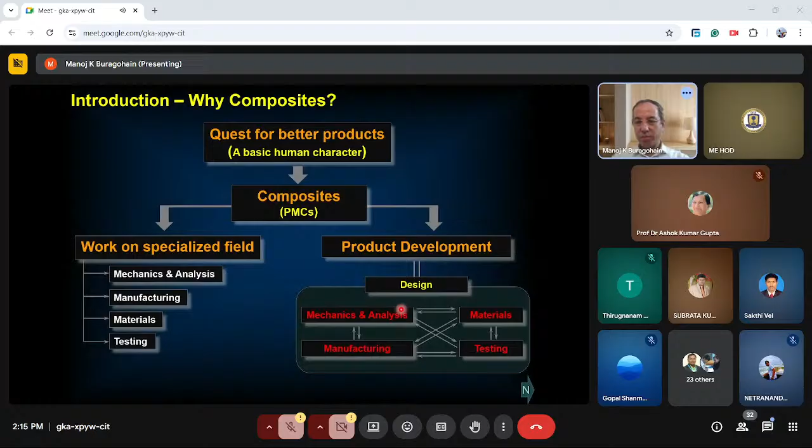Today's discussion will mainly be on the right hand side of this, that is, product development in an integrated manner. Before we go further, let us address and note that composites are used today in a variety of applications.

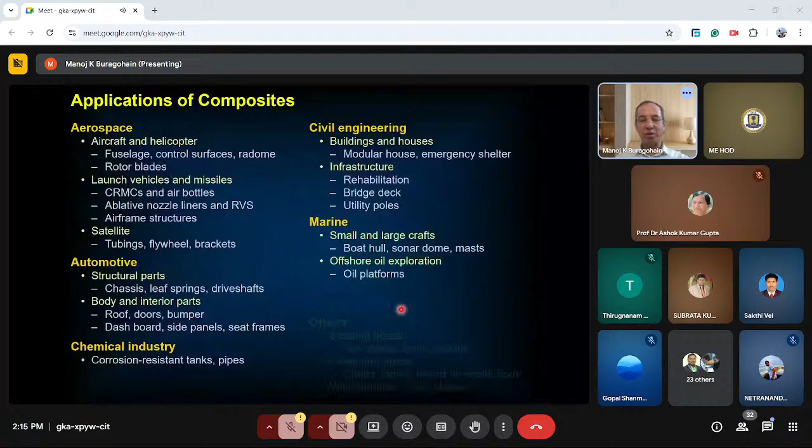I'm not going to read out all of these, but these applications span various fields starting with aerospace, automotive, chemical industry, civil, and so on and so forth - the list goes on.

Based on this, the scope and content of this presentation is basically twofold. First, a brief note on composites, where we will discuss four domain areas. We also, keeping in view the core area of this faculty development program, will discuss how to move forward in mechanical engineering, especially by using AI.

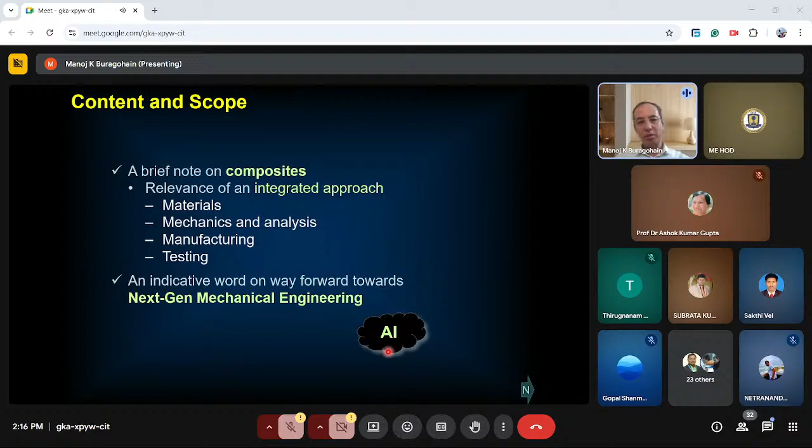But mind you, I am not going to discuss how AI can be adopted or applied - I'm no expert in AI. I'm only going to talk about some possibilities that can help us move forward and do innovations, do better things using AI.

Well, a few of the things will be very brief, very primitive - for example, the definition of composites. I actually do not know the background or composition of the audience, so I thought some things can be very elementary and others probably a little more advanced.

Composites are a kind of multi-phase material. One of the phases is basically reinforcement and the other is matrix. For that matter, whenever we talk about any structure...

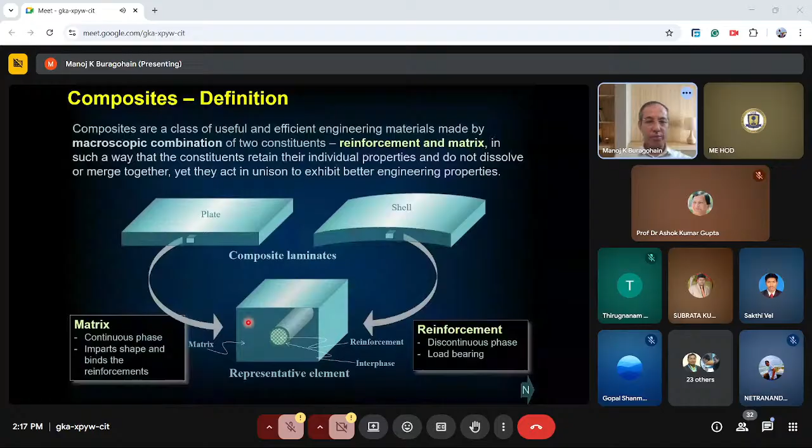A structure can be considered as composed of plates like this, or a shell like this. If you take a very small portion of it, a small element, and if it is a composite, we will have a kind of reinforcement, which is a discontinuous phase and is basically the load bearing phase. The other one is the matrix, which gives us the shape of the material or structure, and binds the reinforcement.

In the definition of composites, we must note three key aspects. First, as I just mentioned, it is a multi-phase material - matrix, reinforcement, and the interphase between the two. Second, the combination is at the macro level - they do not react chemically and do not lose their individual identities.

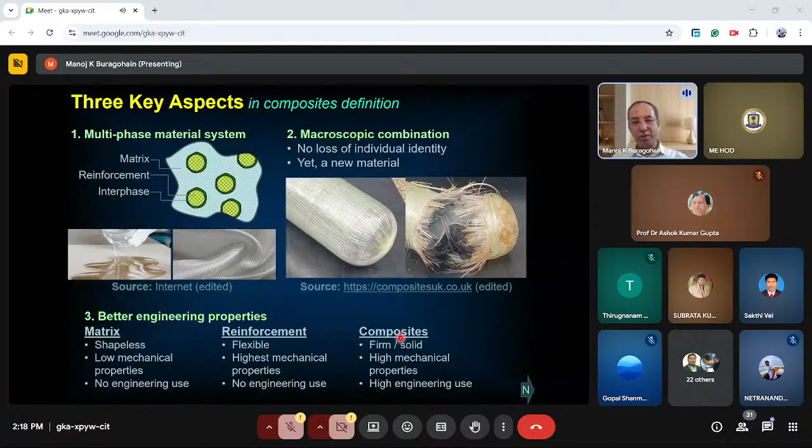For example, in this figure, this is a resin, and this is a reinforcement, some fabric. But when you combine them, you get a product like this, where the individual fibers and the resin retain their individual characteristics. But as a whole, the final product gives us better engineering properties.

Another very important point that I have realized after three decades of experience is that whenever we talk about product development, we must know where we stand. When you look around us, the materials around us are basically of 4 types: metals, ceramics, polymers, and composites.

Composites can have 3 basic matrix materials - either metal, ceramic, or polymer - and accordingly we have metal matrix composites, ceramic matrix composites, carbon-carbon composites, and polymer matrix composites.

Again, depending on the form or physical shape of the reinforcements, the composites can be isotropic, unidirectional, bidirectional, 3-dimensional, and they can be particulate, short fiber, flakes, or laminated composite, sandwich, etc.

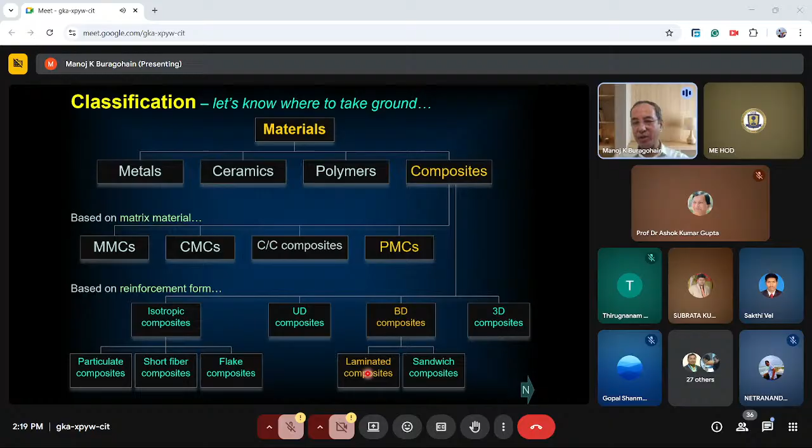Our discussion today will specifically focus on these laminated composites. When we design any composite products, we must know exactly what we are doing the design with. For example, if we are designing using flake composites, the mechanics procedures or design methodologies would not exactly be valid - that would have been otherwise valid for laminated composites. That must be kept in mind.

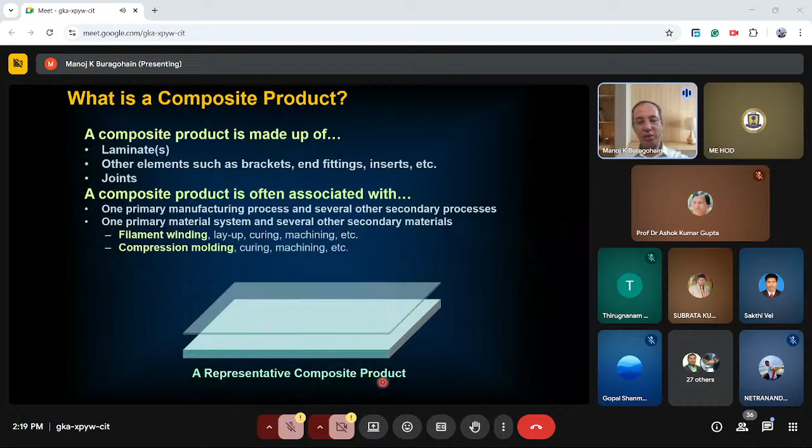Well, what is a composite product? A composite product is basically, I would say, something that would have a laminate - we'll come to the definition of laminate. Okay, you can see what a laminate is.

Basically it's something like this - it comprises a number of plies or laminae, and there are some metallic parts or other elements like a bracket or fittings, etc. And obviously there will be some joint. This is a very basic, elementary definition.

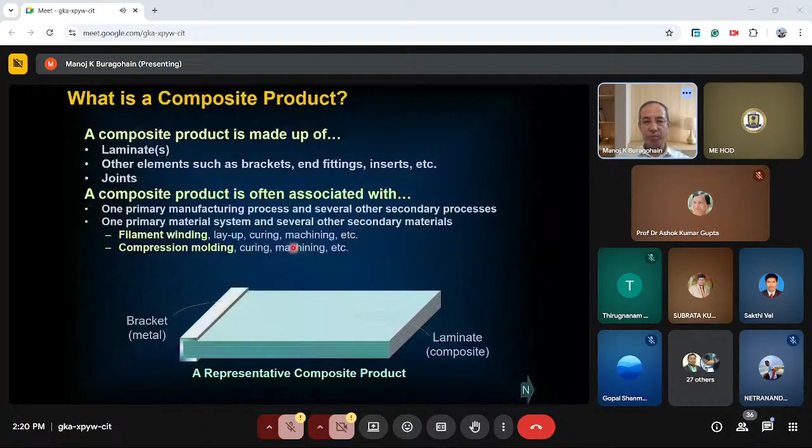Another point here is that in a composite product, composites would normally be a predominant part, and the manufacturing methodology will also possibly be predominantly one. For example, we'll see later that there are different processing methods - manufacturing methods can be different. A composite product can be either filament wound, but with some secondary methods as well like layup, curing, etc., or it can be compression molded, again with secondary methods like machining, curing, etc., and so on.

Now, when we talk about product design and product development, this is something I would like all of us to focus on. Product development can be considered as product design and its translation - that is, we can consider product design as a notional development. That means in our mind, we take care of the development of the entire product till final acceptance and qualification, which would involve considerations of all four domains I mentioned before.

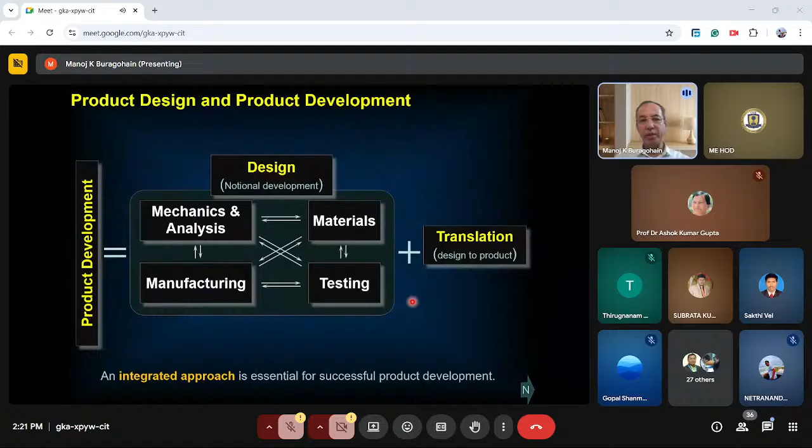Once I have done the design, the product design or notional product development, finally I have to translate it physically to a real product. Today we will be discussing this particular portion, minus the translation. It is important to note that an integrated approach is essential if we have to successfully design a product.

Well, the first part is the materials, and out of the two basic phases, reinforcement is the first one. From a mechanical engineering point of view, three very important aspects to be addressed are what are the common reinforcements available while making a composite product.

The reinforcements can be carbon fiber, glass fiber, aramid. There are other fibers like natural fibers, bamboo, basalt, or boron, and so on. But most mechanical engineering products use carbon fiber, glass fiber, and aramid fiber, out of which glass fiber is mostly used in common commercial applications, whereas carbon fiber and aramid fiber, Kevlar, etc., are used in high performance aerospace and other applications.

In carbon fibers, there are different types like PAN-based, pitch-based, rayon-based carbon fibers, etc., classified basically depending on the precursor materials. Similarly, glass fibers can be E-glass, S-glass, etc., depending on composition. And aramid fibers, Kevlar, Nomex, etc., are basically brand names.

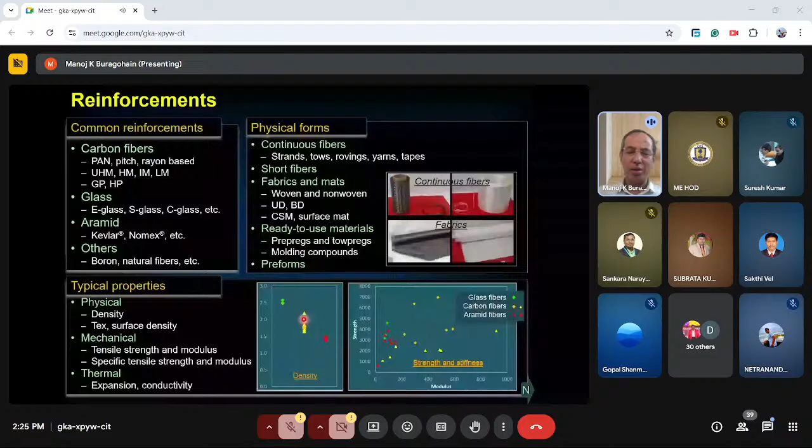Typical properties can be physical properties like density, surface density, etc., mechanical properties like tensile strength and modulus, thermal properties like expansion, conductivity, etc. We should also have some overall idea of what kind of properties a particular fiber can have. For example, carbon fiber can have a very wide variation in tensile strength and modulus, but density is normally reasonably close, varying in a close band.

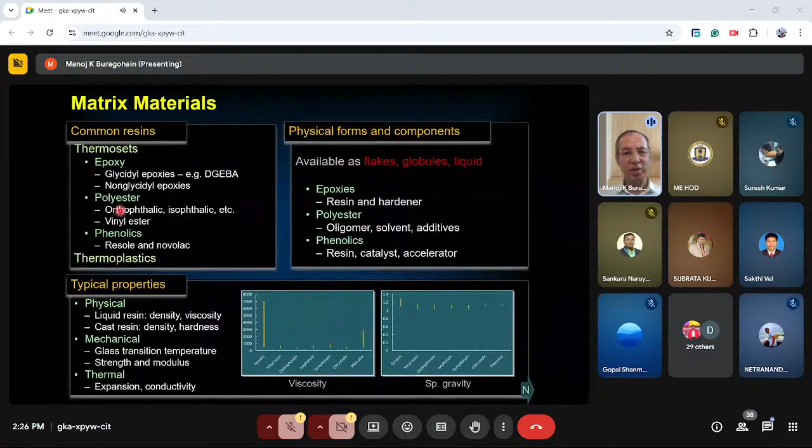Similar is the case with matrix materials. Here also we should know the common resins, the physical forms, and typical properties. Epoxy, polyester, and phenolics are some of the very common resin systems. They can be thermoset and thermoplastics. Epoxy is mostly used in high performance applications, polyester in commercial applications, phenolic mostly in some thermal applications, and so on.

I would not like to spend much time on the details, but I just felt we should know how to move forward. There are many aspects in respect of innovations, but today let us just have some discussion on how we can use AI in the composites.

In the case of materials, AI can basically be used in at least two different ways. One is material property prediction, and thereby selection of materials during design. The basic properties—that is, properties at the sample level and properties at the product level—these two terms should be differentiated. I would come to these product level properties a little later on.

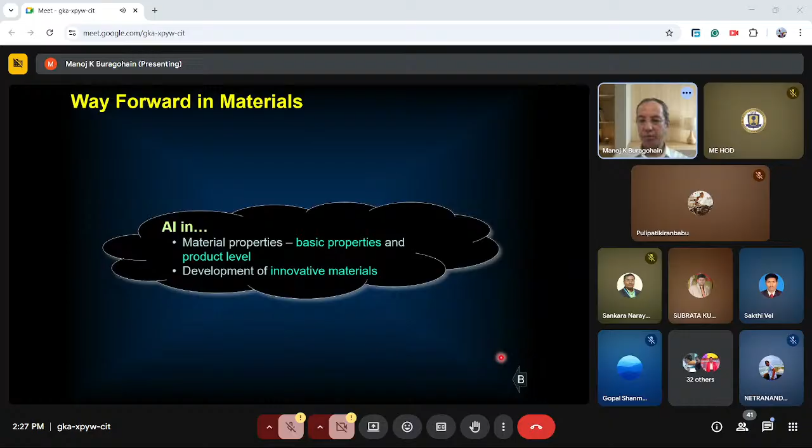The other way is that we need to develop new materials. When it comes to material development, material design, especially in composite material design, is a very important aspect, and AI can make a lot of difference. As a matter of fact, a lot of research work is going on in this field—the design of new composites or new materials.

Well, the next area is mechanics of laminated composites. Now let's have a look at how we define a laminate, or first a lamina. A lamina, as you can see here—sorry, let me just change the pointer.

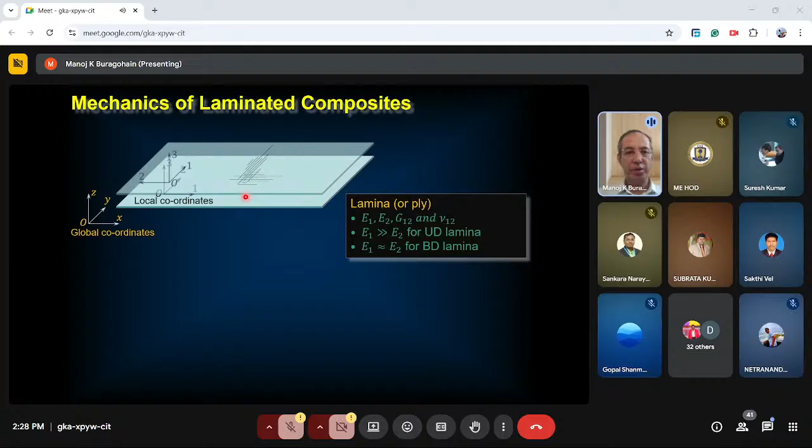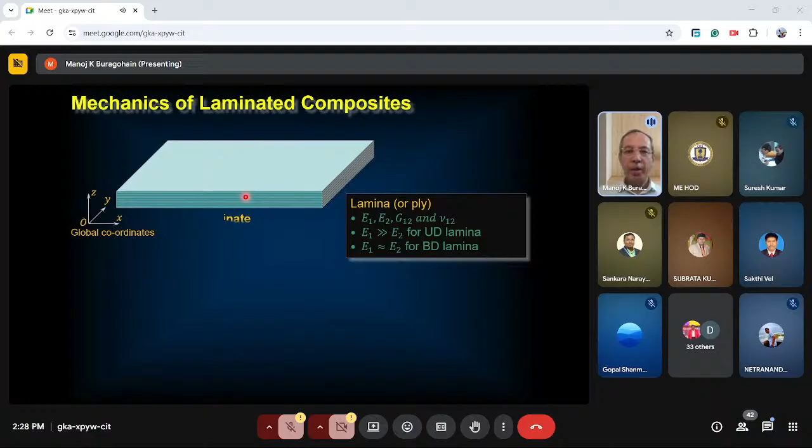A lamina is basically a single sheet of a composite layer. There can be two basic coordinates: one is the global coordinate x, y, z, the other is the local coordinate 1, 2, 3 coordinate system. Now, the plies can be oriented in different directions, as you can see here. So the local coordinates for each ply can be different, whereas the global coordinate is the same for a particular laminate.

And all this put together, what we get is a laminate. A laminate can be a flat panel, or a plate, or it can be a shell. Okay, and when it comes to composite mechanics, by the way, I'm trying to avoid going into the entire solid mechanics here, the total gamut of mechanics. So I just felt, let's just have a quick look at one particular aspect.

For example, for an isotropic material, we have got elastic constants: E, G, and nu, out of which any two are independent. Whereas in the case of composites, this number can actually be 81, but under a number of simplifying assumptions, this number can progressively be reduced to 36, then 21, then 9, then 5, and finally 4 for plane stress conditions, where we have got E1, E2, G12, and nu12.

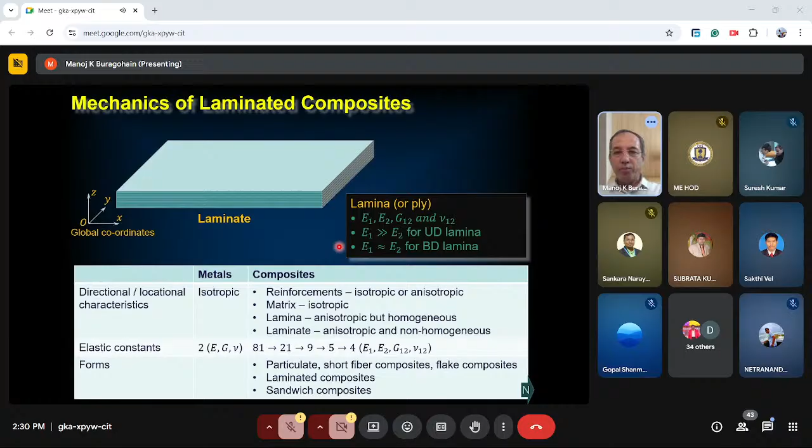And these four elastic constants would actually define a lamina, or a single ply, in our laminated composites mechanics.

And again, when we discuss the mechanics of a composite structure, we can look at it from two angles: on the left side, the levels in the building blocks of a composite structure, and what are the different levels in the study.

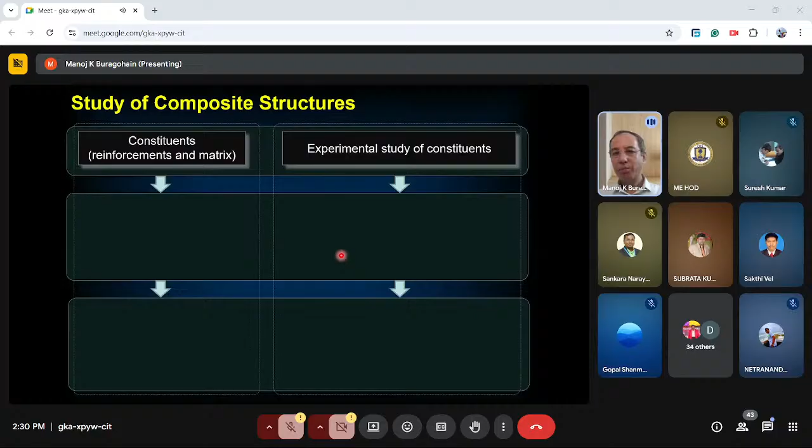As we know, any composite material is composed of reinforcement and matrix, the constituents basically. At this level, the study is basically experimental. The next level is the lamina, or the individual ply. At this level, the study is either experimental work on the lamina or micromechanical studies.

That's where we come across terms like micromechanics of lamina. At this micro level, or micromechanics, we would actually look at the interaction between the resin, the matrix, and the reinforcement.

And a lamina can also be studied at a macro level, where the lamina is considered, as I had shown in the previous slide, represented only in terms of those four parameters: E1, E2, G12, and ν12.

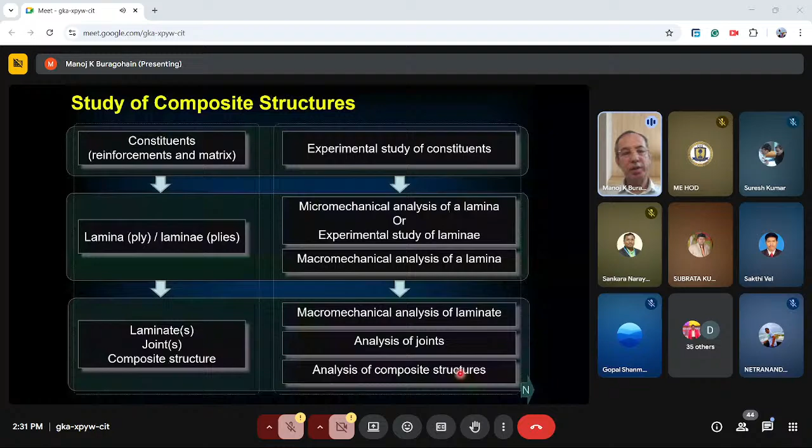And finally, when it comes to a final product composed of a few laminates, joints, and composite structure, here the analysis is essentially at a macro level. So we have got macromechanical analysis, and analysis of the joints and overall composite structures.

And this particular definition, or framework, I've just tried to show in the form of a triangle. Let's look at it a little bit more in detail. At the base of this triangle, we have got the constituents, the fibers and resin.

As I told before, the study here is essentially experimental. The next level is the lamina, or laminae, where the study is experimental, micromechanical, or macromechanical. Then, by combining a few laminae, we get a laminate. At this level, the study is essentially macromechanical.

Then, finally, we get the full-scale product, where the study is essentially experimental, or we can do studies by means of FE and things like that. In between, we have got two more things: the elemental level study and subscale study.

Elemental level study can be, for example, if you consider a laminate that has got some cutout, or a provision for some bracket or similar feature, then the standard macromechanical analysis tools may not be applicable. There we have to devise some sort of specialized element or shape configuration for that particular part, and we study it mostly with experimental work or by finite element.

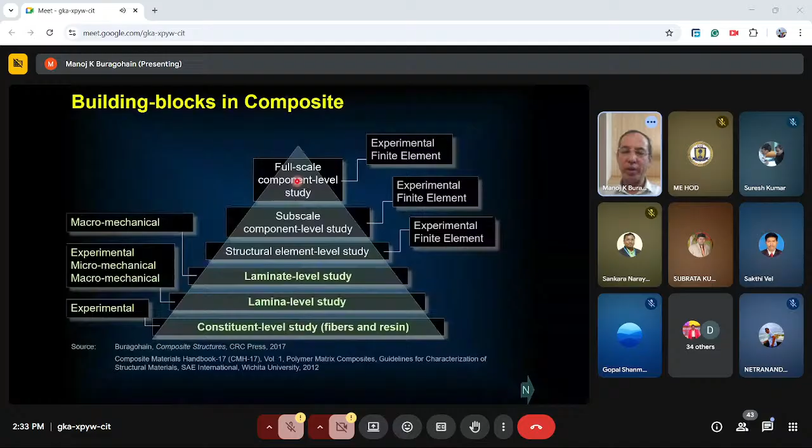Similarly, a subscale component can actually be the full scale component, the entire final product, but modeled at a smaller scale, and there also the work is basically experimental and finite elements.

Well, I'm sure those who are into composites will know what CLT means - classical laminate theory. That's what it is. This is one particular topic that is central to mechanics of composites, especially laminated composites. But here I would like to make another point: most people in the composites industry, especially those on the shop floor,

would consider mechanics of composites as a complex subject. Now, I made a point in the very beginning that classification matters. First we should know where we stand, and after we know that we are in the laminated composites group, and then in this classical laminate theory, the overall procedure is something like this.

We start at the mechanical properties like E1, E2, G12, and nu12 - that is the longitudinal modulus along the fiber direction, the transverse modulus across the fibers, the in-plane shear modulus, and the in-plane Poisson's ratio. These four stiffness parameters would define the lamina, and this is basically for the material.

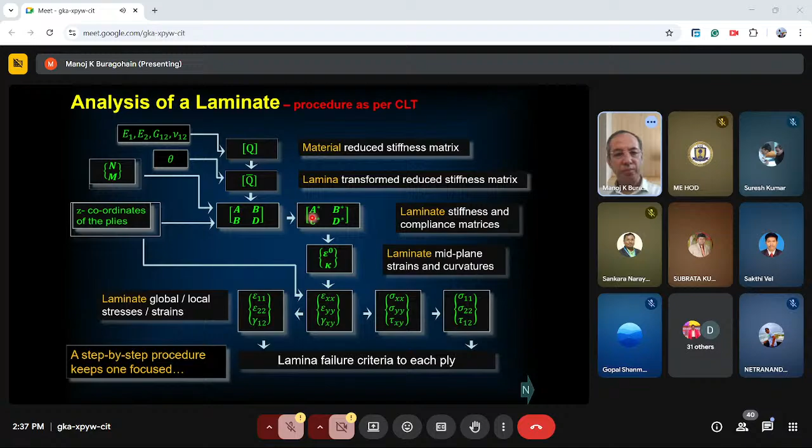This is, in very brief, how classical laminate theory would work. Quite obviously, I have not addressed these parameters in detail, so it might sound a little too much for those who would not possibly know what CLT is. But my only point is that if we follow a step-by-step procedure the way I have just defined, then mechanics is not really very difficult.

Well, finite element analysis, I'm sure everybody would know, but I just felt we should remember a few points. First of all, finite element modeling of composites is not design of composites. I have come across many professionals and students who, whenever I would ask 'can we do a design,' would straight away move to the analysis. There is a basic difference.

There are a number of points that can be cited as the difference between design and analysis. I'm not going into those, but let us note here that there are several FE packages like ANSYS, Abaqus, Nastran, NISA, etc. These packages are definitely helpful, but we must know what is going on when we do analysis using them. We must remember what GIGO stands for - unless we know what these softwares or packages do, we would not really know what output we have got.

In the case of composites modeling, these particular areas must be taken care of: anisotropic material properties - composites are anisotropic, we must remember that. Stacking sequence is very important - in a laminate there are a number of laminae or plies arranged in different orientations. If we do not take care of the orientations, that is Q bar - remember Q bar is different from the Q matrix - if we don't take that into account, we are bound to get wrong answers.

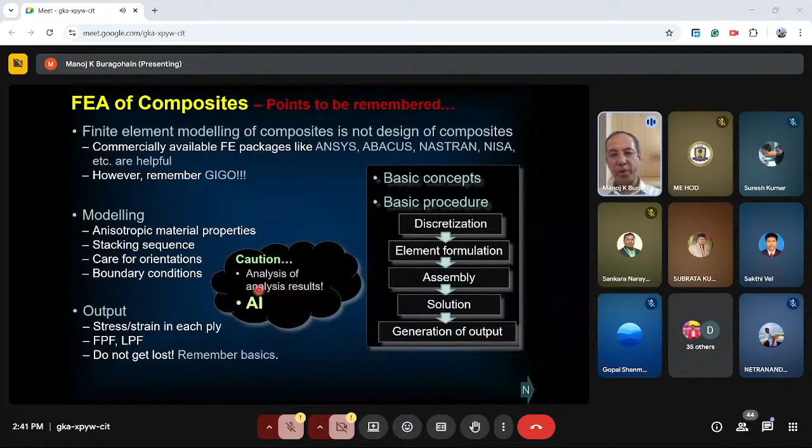It is important, as I was trying to say, that whenever we do any analysis, especially with composites, we get a deluge of information - a lot of data, stress data in each ply at different locations, strain data in each ply at different locations, and in thermal analysis, temperature distribution, and so on. Now how do we take care of this data and come to a conclusion? There is a possibility that we can employ AI to find some pattern in the data output, and possibly do analysis in a more fruitful and meaningful way.

Well, how do we go about it? Mechanics of composites is complex - normally that's what is perceived, and to some extent it is true because of the anisotropy nature of it, and the large number of elastic constants. It can be 81 if totally anisotropic, but otherwise it can be brought down to 36, 21, as I said before, 9, or finally 4 numbers. In spite of that, there are more numbers.

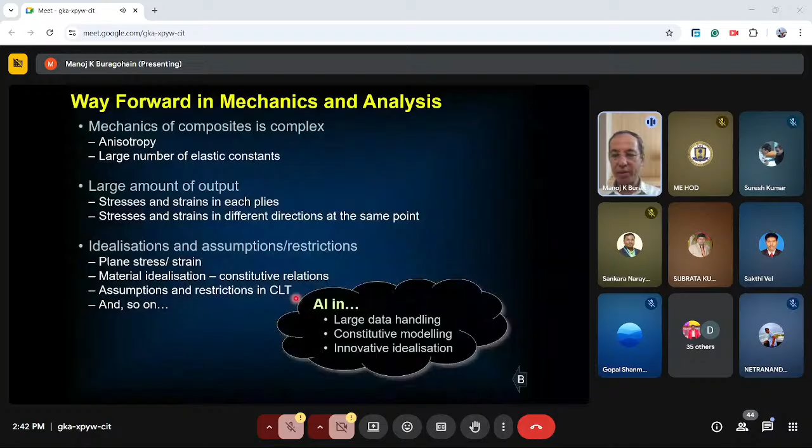A large amount of output data is always created, and idealizations - there are assumptions and restrictions in respect of plane stress and plane strain conditions, material idealizations, the constitutive relations obtained by experimentation, and assumptions and restrictions in classical laminate theory. Are these all valid? Now there is a possibility that AI can help us arrive at or develop some more realistic constitutive model, and accordingly we should be able to do more innovative idealization and get more realistic and efficient analysis of composite structures.

The third domain in composite technology is in respect of manufacturing. Composite manufacturing is different from metal manufacturing - by definition it is a process of material addition, unlike metal where it is a process of material removal. There are different processes that can be broadly classified into 3 groups, and this is only for the sake of discussion, for convenience.

The first one is open mold processes, where you have wet layup, pre-preg layup, spray up, rosette layup, etc. In these processes, you have a mold or kind of metallic plate or some other hardware on which you do a layup. Basically, one side of the mold is open, and that's why it's referred to as open mold process.

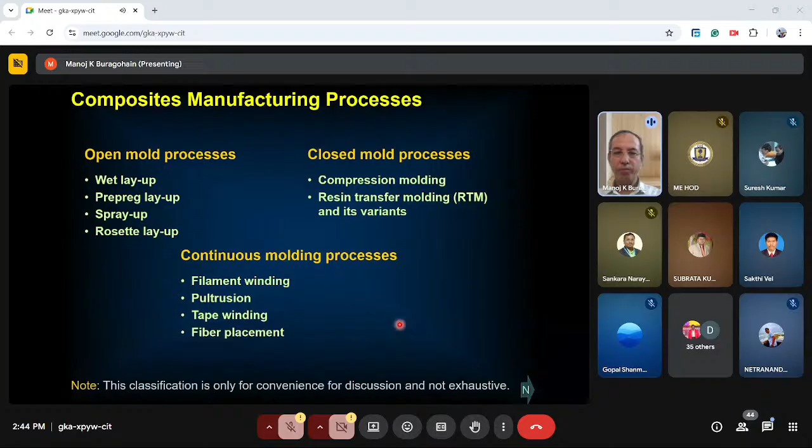Whereas in the case of closed mold processes, there also we use a mold, but there will essentially be at least 2 halves, or a kind of closed cavity will be formed inside a mold where the composite is formed within that cavity. There we have compression molding, resin transfer molding, etc., with a number of variants.

Then we have continuous molding processes like filament winding, pultrusion, tape winding, fiber placement, etc.

Well, irrespective of whichever method we would consider or be interested in using for any composite product development, there are basically four basic steps that are always there in any composite processing. They are impregnation, layup, consolidation, and solidification. Note that these four steps will necessarily be there in any manufacturing method in composites, but the way we implement them would depend on the particular method, and the sequence can also be different. But let us know what these four steps are.

The first one is impregnation. This is a process where basically each and every filament in the reinforcement is wetted by the resin.

The next one is layup. It corresponds to orientation. Basically, the wetted reinforcements have to be placed in their respective orientations.

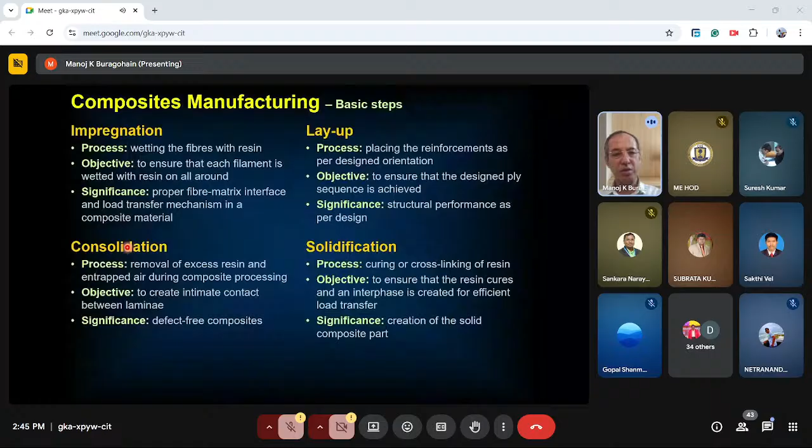That concerns the layup. The third one is consolidation. In this step, we ensure that excess resin or any air gaps are removed, so that there is intimate contact between the wetted fabrics or wetted filaments.

And finally, a composite takes shape when the resin solidifies. When we make a composite product during impregnation, the resin is in a liquid state, and it has to solidify. This is mostly referred to as curing, during which the resin undergoes cross-linking. Small polymer molecules in a monomer cross-link and become large molecules, forming a complex three-dimensional network of large molecules. As the resin cures, the composite gets its own solid shape.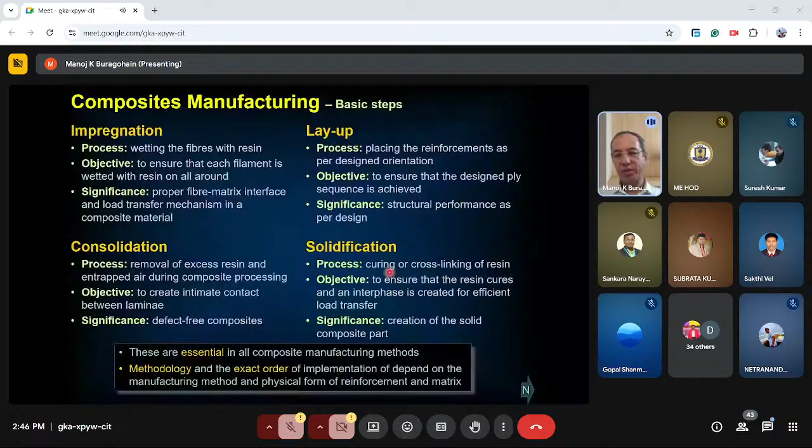As I said, these are all essential steps, but the methodology and exact order of implementation depend on the manufacturing method and physical forms of the reinforcement as well as the matrix. Let us have a look at the various methods quickly.

For example, wet layup. As you can see here, there is a mold. This is one-sided, so it is called open layup. We go on placing the fabrics, dry reinforcement or wetted reinforcement. This is how a layup goes.

There are a number of advantages and disadvantages. It is a simple process and needs very low capital investment, but it is highly labor intensive. Part quality is often dependent on individual skill, and the process is somewhat messy.

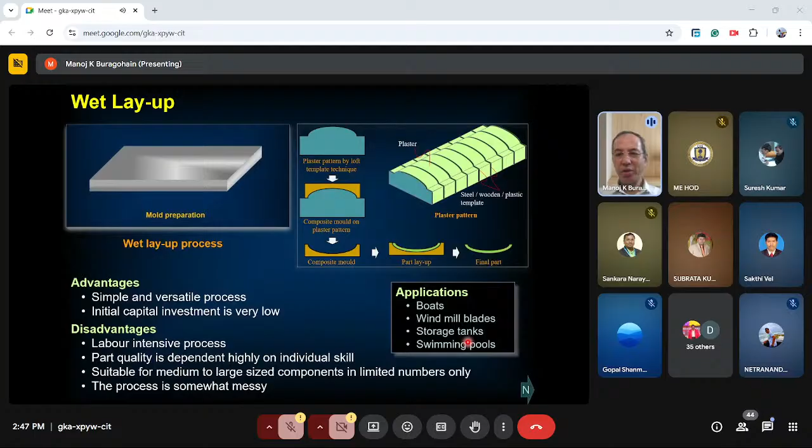A number of applications use this method, for example boats and windmill blades. You can use a kind of loft template technique for making blades, swimming pools, storage tanks, and so forth.

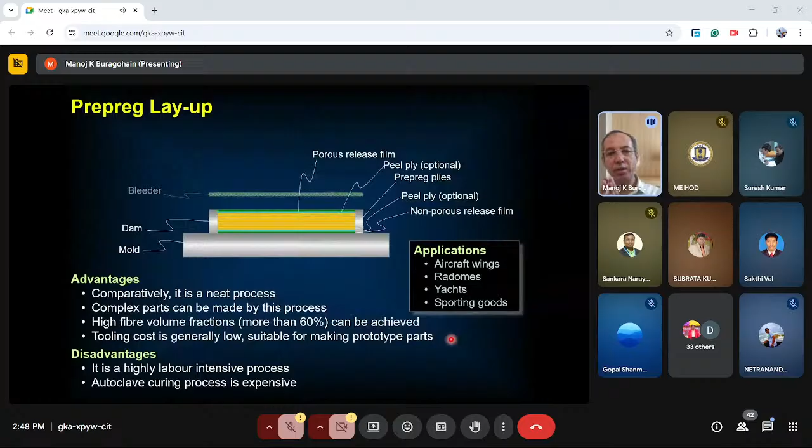Then pre-preg: here the impregnation of the fabric takes place earlier, before we go to the shop floor, and the resin in the reinforcement is advanced to a stage called B stage, where it becomes easily usable and is stored in cold storage and used in this way.

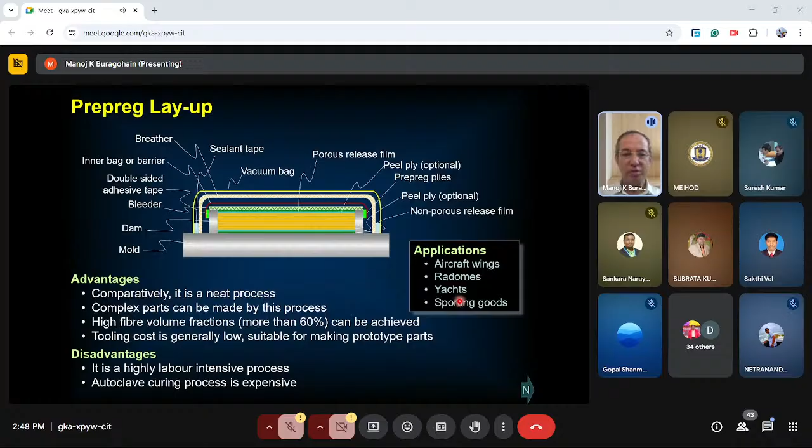It is cured mostly under vacuum in an autoclave, where we apply high temperature, along with positive pressure and negative pressure, that is vacuum. This is also an open mold process, and it can give rise to very good products.

For example, aircraft wings, radomes, sporting goods, etc. use this process. But it has some disadvantages: it is very expensive, especially the autoclave consumables, and the autoclave itself is also very expensive equipment.

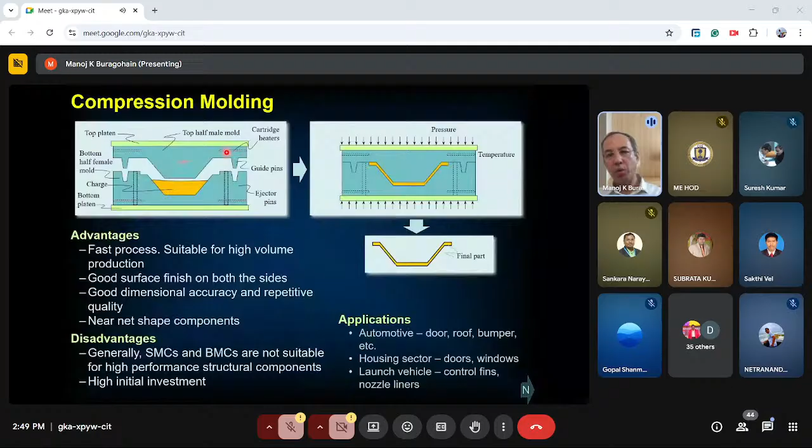Then compression molding is a closed mold process. As you can see here, there is a mold at the bottom and a mold at the top. When you close the mold, in between there is a cavity. This cavity corresponds to the part, and the part shape is obtained from the mold.

This process can be done with the help of some molds. There are advantages and disadvantages, which you will get to know.

In the automotive sector, this is a very common method. In the housing sector also, doors, windows, etc. are made. Launch vehicles, some control fins, nozzle liners, etc. are made by this method.

We can make near net shape products, and there are other advantages, like good surface finish all around, and investment can be low initially. But tool design is normally very complex, and process modeling is required. Many parts are made using this process.

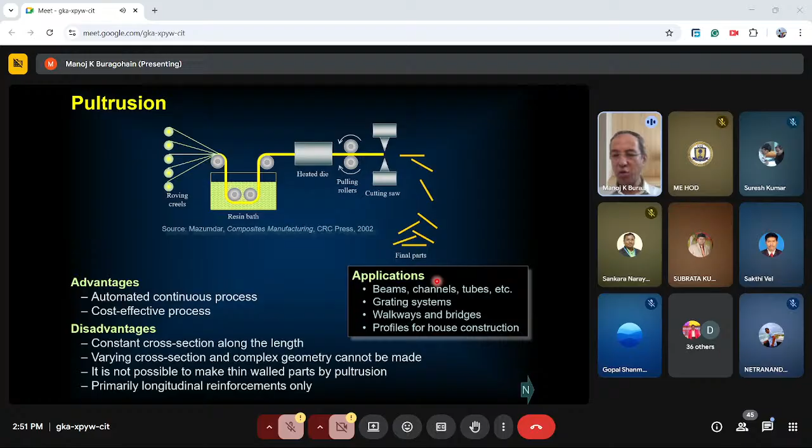It is a very fast process and can be highly automated, but one of the great disadvantages is that the cross section of these parts is mostly constant. It is good for making beams, channels, etc., and various profiles for house construction, for example window panels, door panels, etc.

I will spend some time on filament winding. This is another continuous molding process, usually used for making parts like pressure vessels, hydrogen storage tanks, rocket motor casings, pipes, storage tanks, etc.

Here it is something like this. You can see here there are some spools. We load the unidirectional fibers, for example roving or tows, and these rovings or tows are pulled through a resin bath as shown here, and then deposited on a rotating mandrel by a payout eye.

Let us have a look at how the four basic steps are implemented in filament winding. Impregnation can be either wet, or wet re-roll and dry.

Let us just look at wet. In this resin bath, the fibers get wetted. That's where impregnation takes place.

Layup: here we are bothered with the orientation. The mandrel is rotated, and when the mandrel is rotated, the payout eye, or the fiber depositing head, also moves along the length and across the length, and also it can rotate.

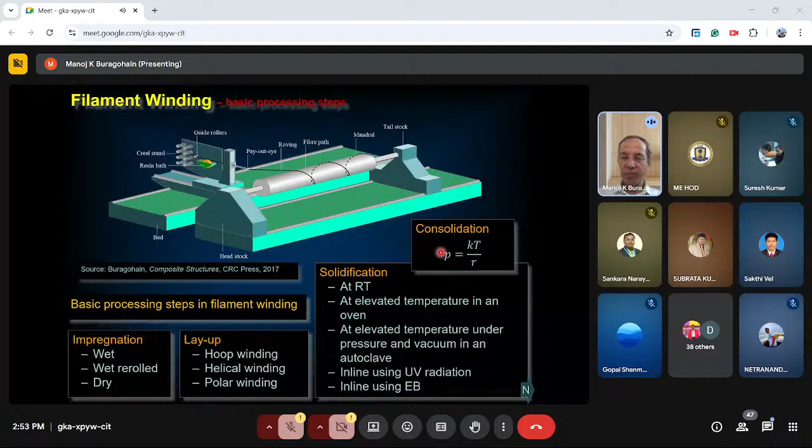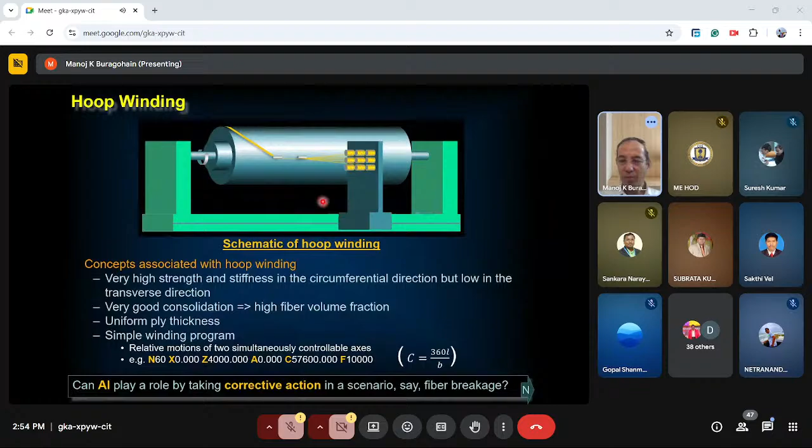Can AI play some role in hoop winding? Imagine while doing hoop winding, some filaments break. Instead of stopping the machine, can AI take some corrective action to change the winding program in real time so we continue? This is for innovation.

Now, helical winding, as I just mentioned, is along a helix. As you can see here, this is helical winding going on. The mandrel is made to rotate. Here you'll probably be able to see the axis moving in this direction, but the payout also actually rotates, and it can move across the normal to the mandrel axis.

So this is the forward pass that is happening, then it takes a reversal from the other end, that is a reverse pass, as you see now. A winding program can have a number of blocks. A typical block is shown here: X, Z, A, C are all non-zero, meaning different axes of motion come into the picture.

It forms some sort of studs like this, and what we get is a kind of double ply construction. The angle of winding, defined here, is a major parameter in the design of any helically wound structure.

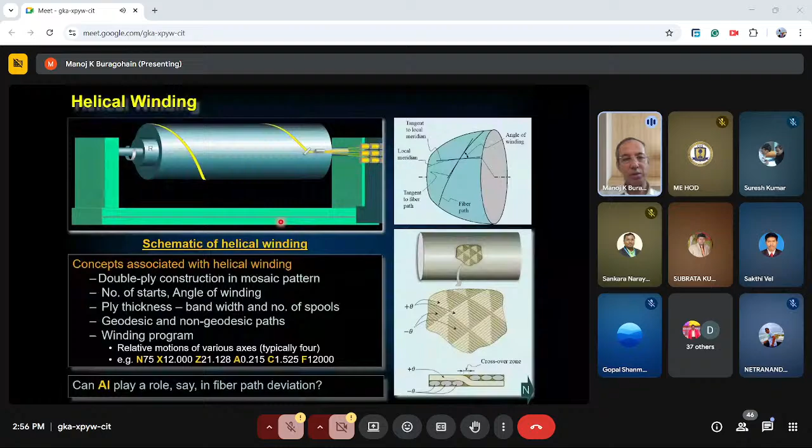Once again, AI can play an important role in fiber path deviation. For example, while winding, if for physical reasons the fibers get deviated from the desired path, can we modify the path or program to correct the winding?

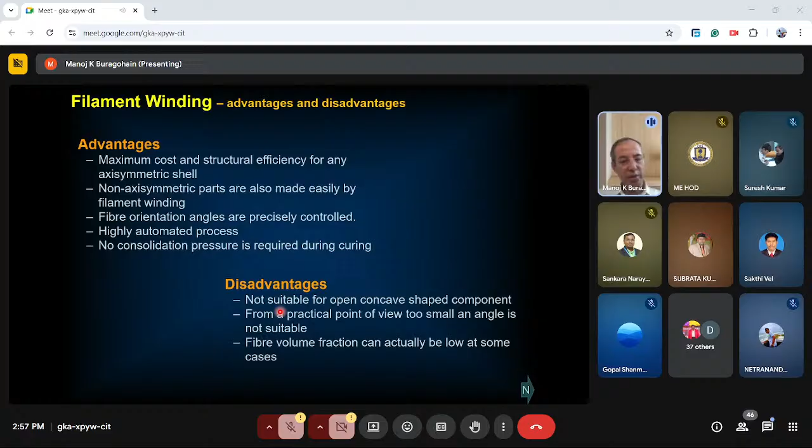Advantages and disadvantages are also there, definitely, in filament winding. One of the most important advantages is that no consolidation pressure is required in filament winding in general, so an autoclave is not really necessary. It can be highly automated, and fibers can be placed accurately by filament winding.

But amongst the disadvantages, it is not suitable for concave outward parts, and fiber volume fraction can sometimes be low. There are other aspects in any composite processing, for example filament winding too, regarding tooling and processing.

The tool that is used in filament winding is basically a mandrel. A mandrel can be of different types - it can be integral, collapsible, inflatable, lost mandrel, etc. Mandrel design, mandrel materials, all these parameters do come into picture.

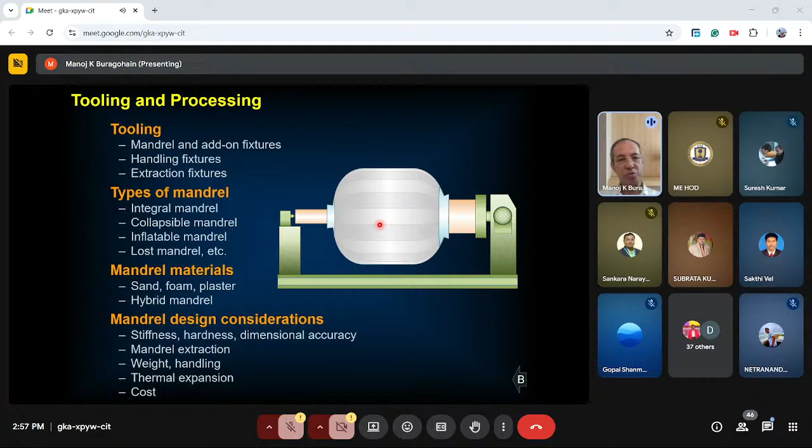For example, let's say we are designing a hydrogen storage tank, a CNG cylinder, or some pressure vessel. Quite obviously, the openings would be small, but the main mandrel would be much larger. After winding, the mandrel has to come out through the small opening. How do we make it happen? Those aspects actually will have to be addressed while designing a mandrel.

Next comes a major question: how do we select a particular manufacturing process for a particular application? Let's say I'm designing a hydrogen storage tank, or a wing for an aircraft, or a utility pole for electricity distribution. Which particular process should we select? This process selection can basically be addressed from two angles: the parameters related to the product and parameters related to the process.

That can be the very basic description of the product or product requirements. Some products require particular things from the process. For example, some product may demand high surface finish on both the surfaces. If that be the case, filament winding probably may not be the best route. Similarly, hand layup or open layup, whatever we have seen in the very first place, probably will not be good if we need good surface finish on both the surfaces.

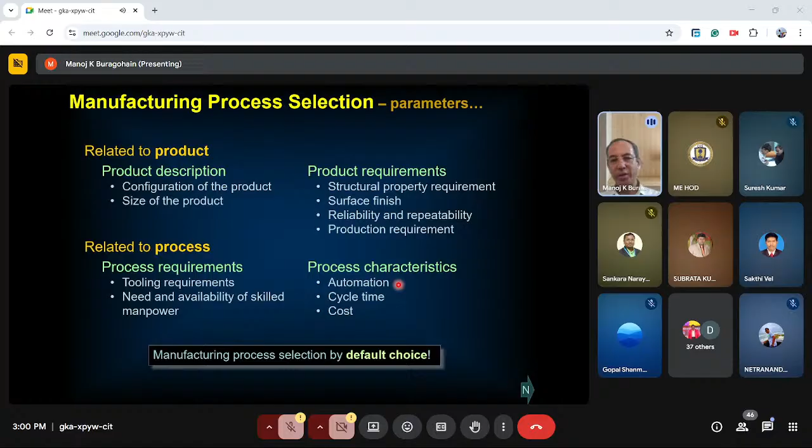Although there are so many processes and parameters to be considered, luckily for various processes and applications, many manufacturing processes go as a default choice. For example, if you are designing a pressure vessel, probably filament winding is the default choice. If you are designing a wing for an aircraft, maybe pre-preg layup would be the default choice, and so on.

In composite manufacturing too, there are many innovations that can happen, and some of those innovations can be automation, etc. But one thing we can probably bring in is application of AI.

Process design - in composites, the structural design itself is not adequate. We have to do a lot of process design. The structural design would say there should be 5 layers, 10 layers, 20 layers at different angles. But when it comes to process design, we actually have to say what would be the size and shape of each development, which development has to come at what instant in time, what should be the kind of overlap between two sheets, and how do we model this? AI can actually help in this kind of process design, modeling, and process monitoring.

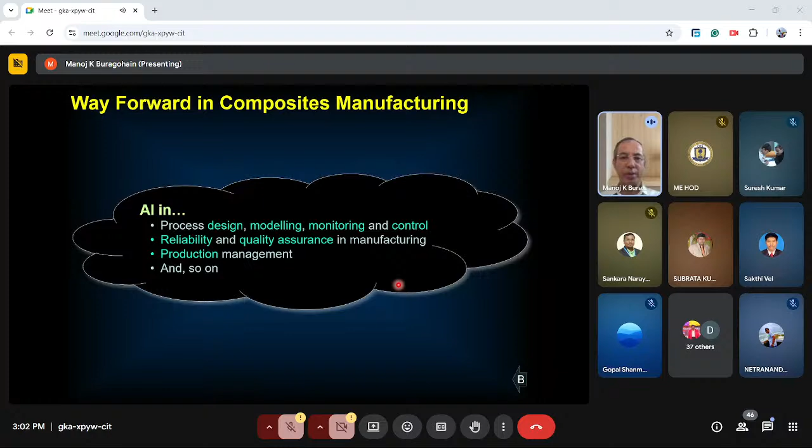Let us go back to our filament winding. When we are doing filament winding, the resin viscosity has to be maintained at some particular range, temperature has to be maintained, then filament tension has to be maintained. All these parameters are monitored mostly manually. Now we can possibly automate them, but at the same time we can possibly not only automate but also monitor them with the help of some AI-assisted system. Accordingly, whenever there is any deviation, the AI system possibly can take corrective action and control accordingly, and the reliability and quality assurance in manufacturing can be improved.

When we proceed or graduate from development to production, in a production environment there are many more parameters to be looked at, and that production management can be controlled, can be overseen by AI. So on and so forth - we have got many areas where AI possibly can help.

The fourth area or domain is testing in composites. Let us know the objectives. Tests are carried out basically for 3 reasons with 3 goals. First one is design and analysis - during any design of any product and analysis, we need material data, and this data has to come from testing. Then in any product realization or product development cycle or product manufacturing, quality control and quality assurance, QC and QA, play a major role.

In QC and QA too, testing plays a major role. We have to know what the incoming material is, and it has to be cleared by testing. Once the product is made, we have to test it to see whether it is acceptable or not, whether it can withstand the desired loads or not.

The third area is research and development. For developing new materials, for example, we have to carry out tests, and that data will also come from tests.

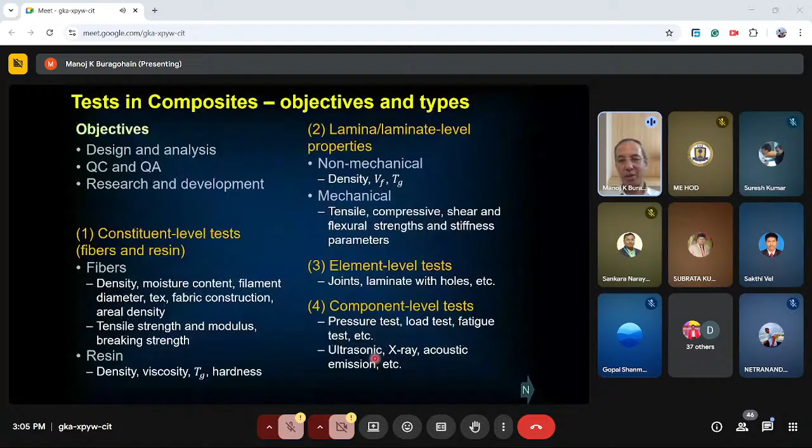There, the same parameters are required to be tested. Then, as I talked about, element level tests - there we test joints, laminate with holes, etc.

Finally, subscale component and full scale component - there we carry out tests like pressure vessel tests, load tests, fatigue tests, etc. And there are also non-destructive tests like ultrasonic examination, X-ray, acoustic emission, etc.

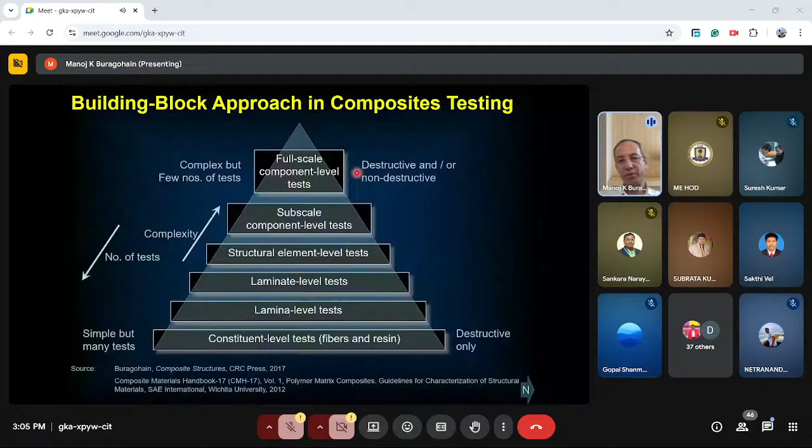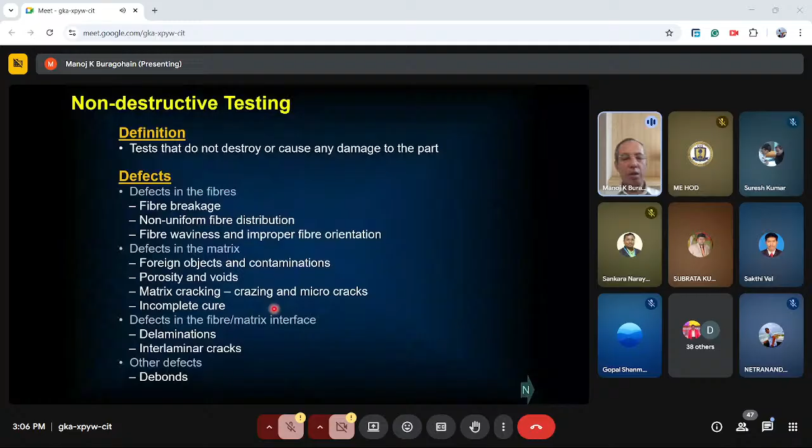At the bottom level we have simple tests, but many of them, predominantly destructive. As you go up the triangle, the number of tests comes down - at the top we may have only one or two tests, but the complexity increases. At this level, tests can be destructive or non-destructive, both.

Non-destructive testing, by definition, does not destroy the product or cause damage to the part. We carry out non-destructive testing mainly for identifying or detecting defects.

There can be one more dimension to it, which I have not shown here, but let me explain why I have chosen to show these particular defects. On many occasions, from experience, I have found that people confuse these defects. Defects can be in respect of the fibers - fiber breakage, non-uniform fiber distribution, etc.

Defects can be in the matrix - foreign objects, contaminations, porosity, matrix cracking. Defects can also be in the fiber-matrix interface, such as delaminations, and there can be other defects like debonds. The terms delaminations and debonds are mostly confused by most people.

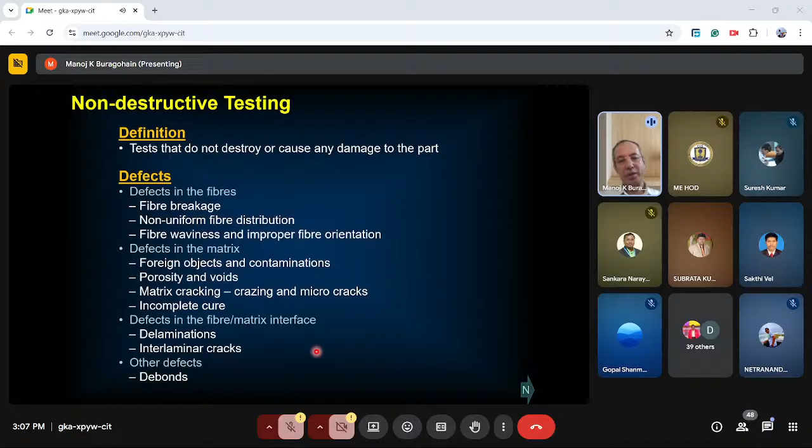There can be one more application of non-destructive testing - evaluation of material properties at a product level, which is an area that is slowly getting more and more importance.

What can we do in testing with the help of AI? Data interpretation, for example - let's say we have done some radiography and have some radiograph films. I'm sure everybody would know what a radiograph is. Now, how do we interpret a radiograph?

Or let's say we have done some ultrasonic examination - how do we interpret the data? AI can actually help us. A machine learning based model can be trained, and it can consistently and correctly interpret films, acoustic emission, or UT readings.

Non-destructive evaluation of material, as I mentioned in the previous slide - AI can actually help in the non-destructive examination of a material at a product level. Actually, this particular point I mentioned in the beginning also.

Material properties that we use in our design and analysis are basically from samples. But how do we know that the same material properties are actually valid in the final product? Because in composite materials in particular, the product or material is created during processing. If the processing methodology or conditions are not exactly the same as the conditions of making the samples - which is normally the case - then it is very unlikely that the material properties would be the same in the product as they were in the sample.

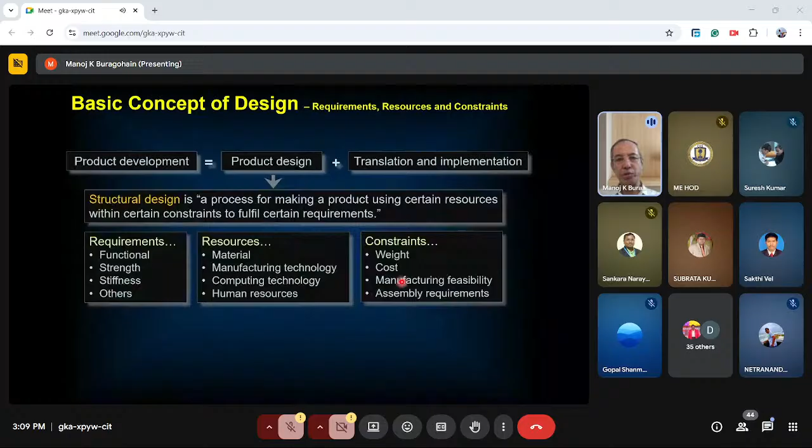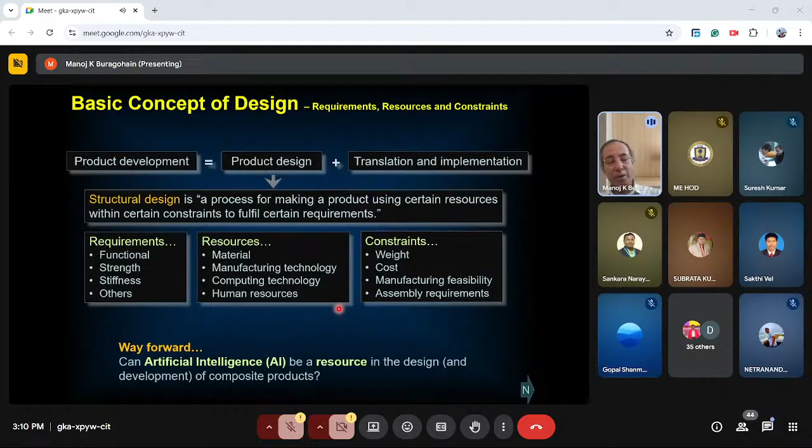We have gone through all four domains in composite product design. Then finally we need to look at the very area of product design. What is design? We all know it is basically a process where we have a requirement, we have some resources, and under some constraints, we get a solution to meet the final requirements.

I'm not going to elaborate on these things, but just a query: can artificial intelligence be considered or used as a resource in design? Well, someone said that it cannot be a resource, it is actually a partner. Whichever way you consider it, can AI be used in product design?

Product design is not exactly a streamlined process that follows any particular sequence. As mentioned before, it has materials, manufacturing, testing, mechanics and analysis. All these areas are interconnected in the design domain, but our thought process works better if we arrange them in some sort of steps. So I feel comfortable placing them in 7 steps.

Generation of specifications: whenever we have to design any product, first we need the specifications. This is the first step, but mind you, this is not a one-way traffic. It's not that the customer just states requirements and those become the specifications. In most cases, the specification has to be arrived at through a number of iterations.

Across the table, we have to discuss and finally come to a common ground on the final specifications. As a matter of fact, sometimes during the process of evolution or development of the product, specifications also get modified.

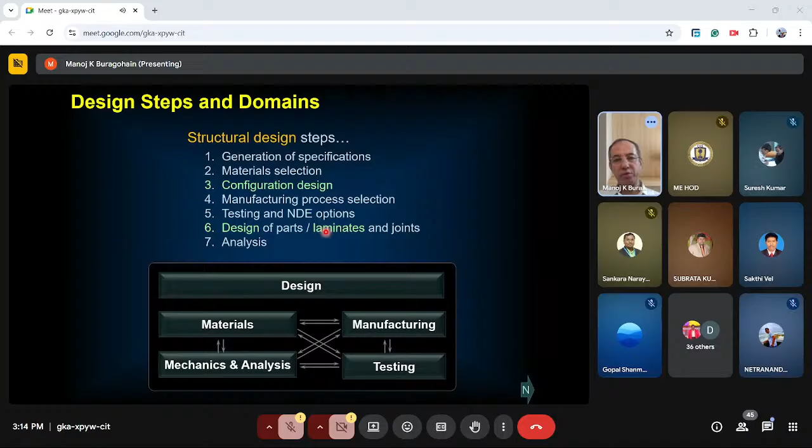The testing and NDE options: this is important because if we do not pay adequate attention to testing and NDE options at the beginning of the design process, and finally we are not able to do any non-destructive evaluation of the product to say it has no defect or is usable,

then its acceptance is doubtful. Then design of parts, especially the laminate and the joints, and finally analysis. I would actually like to address configuration and laminates. Laminate design is something different and peculiar to composite design, so we'll address this particular part a bit in detail.

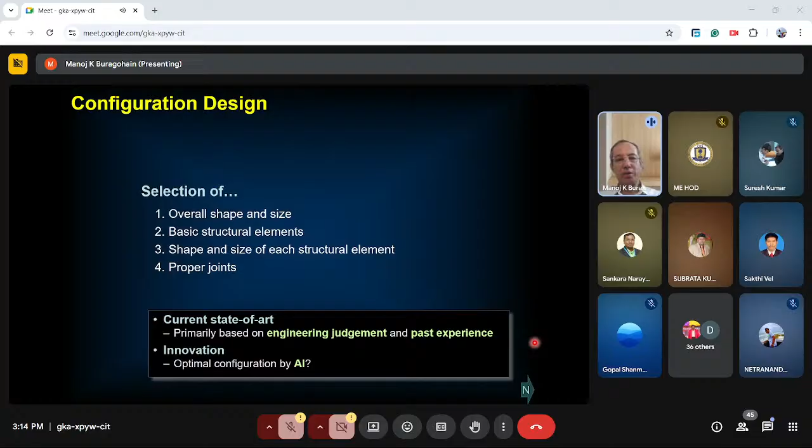First, configuration. What we understand by configuration is basically the overall shape and size. What should be the shape of a product? For example, all of us are possibly sitting inside some room, some hall, whatever. Now, I'm sure these rooms have got some walls. Why should the place that we are sitting in be of the shape that it is?

That shape and size basically constitute the overall configuration of a product. When we do configuration design, we make a selection, a choice, in regard to the overall shape and size.

Any structure is made up of a few basic structural elements. There can be beams, shells, or plates, and we choose what these basic elements will be. For example, a utility pole can be a long pipe kind of structure, maybe a long shell. There will be other elements like adapters, or maybe cutouts with some reinforcement.

The shape and size of each individual structural element will also have to be chosen during configuration design. And finally, proper joints. Joints are normally the weak links in a structure, and proper configuration of joints is an essential aspect of configuration design.

Let us note that the current state of the art is that primarily configuration design is based on engineering judgment. As I was just referring to our own room or buildings that we are sitting in right now, they are definitely designed based on past experience and engineering judgment.

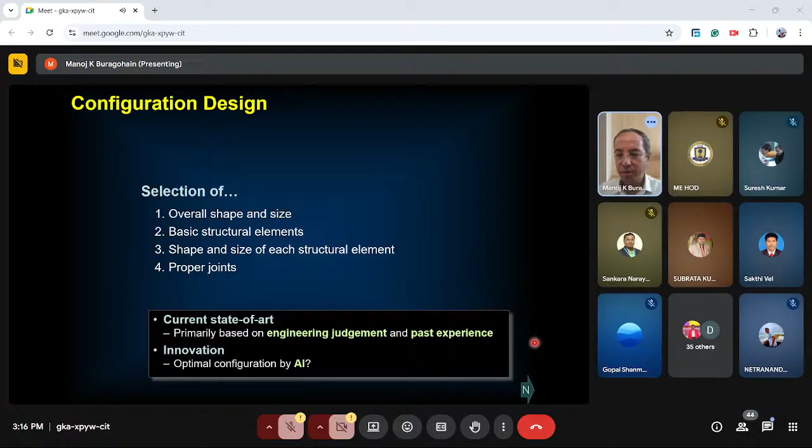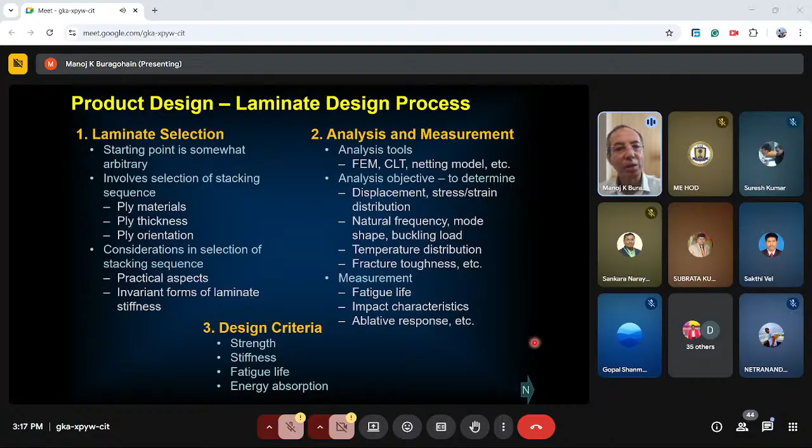Now there will have to be some innovation. Why should the room be cubical the way they are? Why should the walls be mostly flat and straight? Why are they not in the shape of some shell? Maybe some other shape would be more optimal or efficient. When we consider this kind of configuration, the options available in front of us are infinite, and AI possibly can help us make the right choice in this direction.

Laminate design, the ply sequencing, is a central concept in composite laminated product design. In laminate design there are three areas: laminate selection, analysis and measurement, and finally design criteria. Laminate selection is basically what kind of plies we have to have, what orientations, etc.

Unfortunately, the starting point is somewhat arbitrary. What we do here are mainly three aspects in the selection of any stacking sequence. We choose the material of each ply — it may be carbon epoxy, glass polyester, Kevlar epoxy, and so on. The material for one ply need not necessarily be the same as another; it can be different from each other, and only compatibility needs to be seen.

The thickness of each ply and their orientation — these are the basic three things that we have to choose. But again, the starting point is actually arbitrary. Even if we have chosen the material, thickness, and orientation, we have practically infinite options.

For example, the orientation can be from 0 to 90 degrees, but between 0 and 90 for each ply we have infinite options, and infinite options for the number of each ply. So accordingly, we have practically innumerable infinite solutions. Now, which is the best one? We do not know.

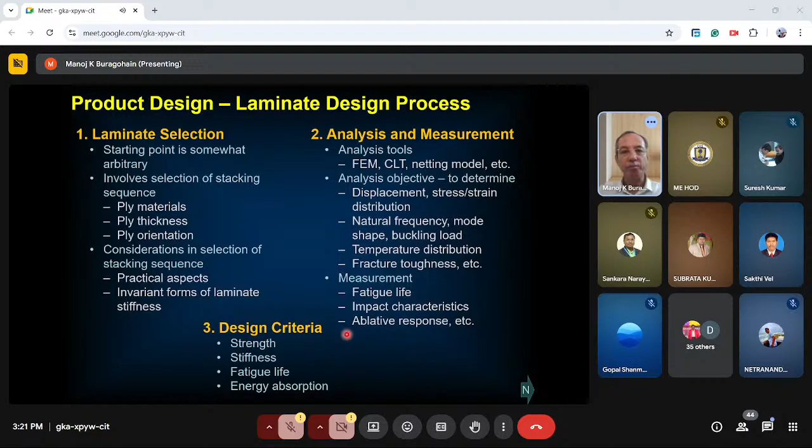Then we bring in some design criteria like the strength-based criteria, stiffness-based criteria, etc., and let us bring in the concepts of failure criteria. In metal, the failure criteria are principal stress, principal strain, etc. In composites, these criteria are in respect of strength, maximum stress criterion; in respect of stiffness, maximum strain criterion; and there are other criteria like Tsai-Hill criterion or Tsai-Wu criterion, and so on. Similarly, for fatigue life, energy absorption, etc., based on the measurement value we get, we apply these things against our acceptance limit, and then come to a conclusion whether our chosen laminate is safe, acceptable, or not for the given loads.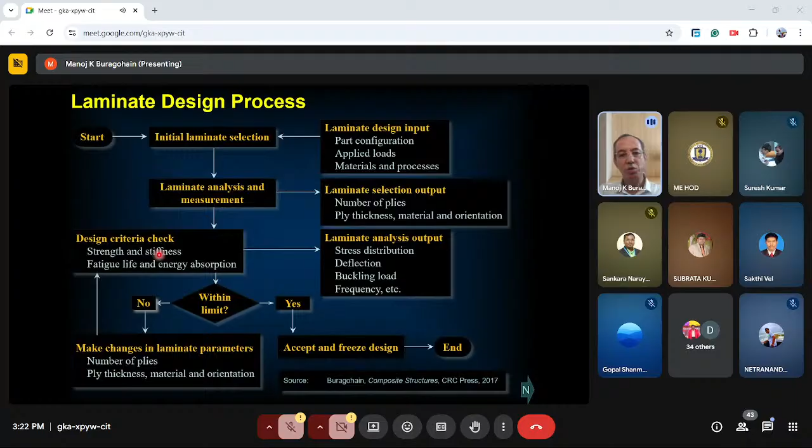Mind you, this becomes a kind of iterative process, and because of the iteration, there can be n number of iterations, but practically this number will have to be limited when done manually. If we have some sort of automated system, controlled or based on AI, this process can be automated and improved, and we would be able to get a much better solution. This is what I am trying to show here.

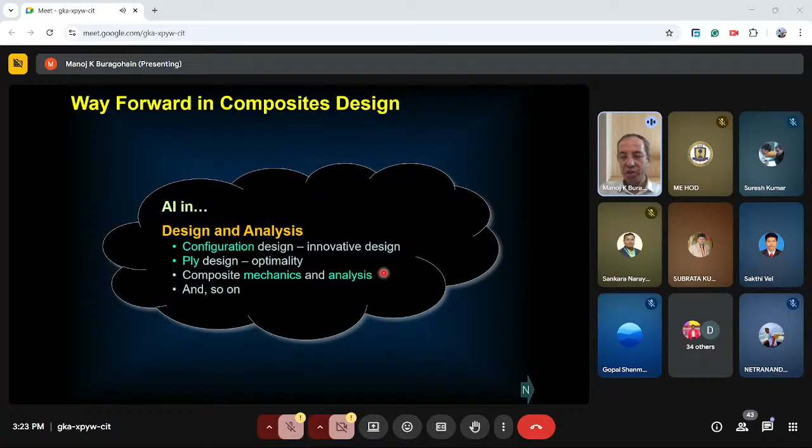Configuration design - AI can help us. Ply design - we can bring in optimality by AI. Composite mechanics and analysis - remember we had talked about the constitutive relations based on experimentation. There, probably, we can develop more innovative and optimal, more realistic constitutive relations.

I would like to conclude now with these broad two aspects. In composites, in mechanical engineering, we can work in closed compartments if we wish to, in specialized fields. But if we have to work on a real life structure, it has to be a kind of integrated approach covering materials, mechanics and analysis, manufacturing and testing, as shown here, which is essential for successful product development.

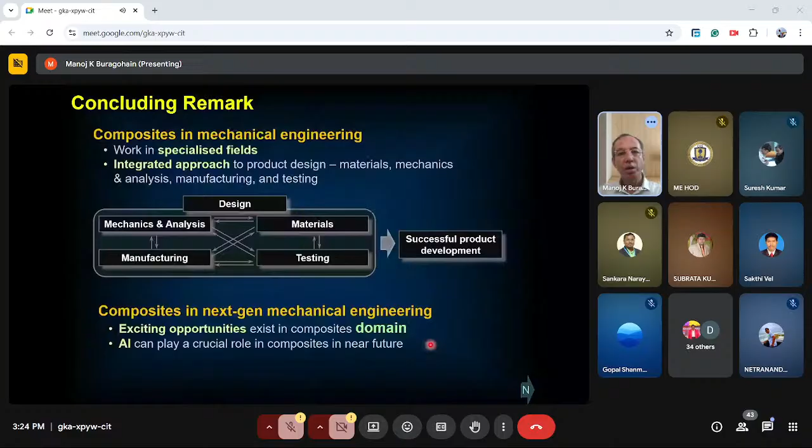And for composites in the next generation of mechanical engineering, exciting opportunities definitely exist in the domain areas that we mentioned. AI can play a crucial role. I have only given a few possibilities - there are plenty more that exist. Most of the things I have presented today are basically borrowed from my book. If anyone wishes to know more, it is available.